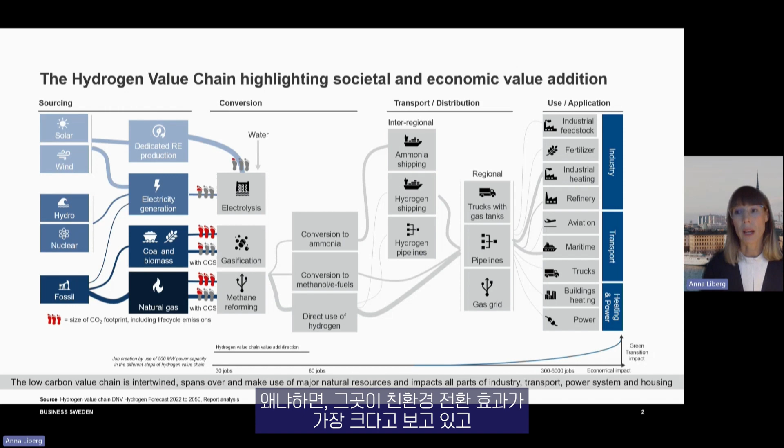And in the Nordics and Sweden, we would like to be part of all the steps, to also go all the way to what we call the top of the hydrogen value chain, which is to the right of the picture here, to also be part of the use and application side, because that is where we see that we have the maximum green transition effect, and where we also create the highest number of job opportunities, as well as export or import value. And we see a great potential with partnership with Korea and Korean companies to put both Sweden and Korea at top of the hydrogen value chain.

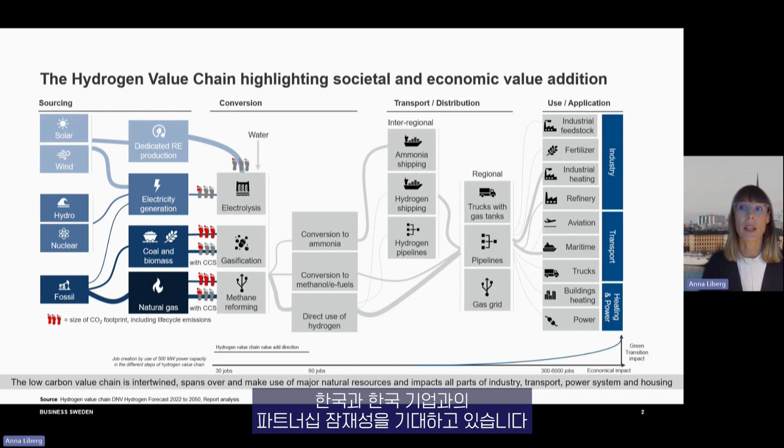I would just like to zoom out of Sweden and put Sweden into the context of the Nordics, our neighbors, because we share a few common important factors when it comes to hydrogen. We are a region that is fortunate to be very rich in producing electricity, and that is fossil-free, and to a very large part renewable electricity. An interesting data point is that Sweden is actually EU's largest net exporter of electricity, and that is fossil-free electricity.

We also have abundant amounts of fresh water and space. We have a very strong industrial heritage in all the different application areas where hydrogen is used. But I would especially like to highlight that we are all globally top ranked within innovation and sustainability rankings, which we believe is also crucial when it comes to pushing forward in development of application of hydrogen.

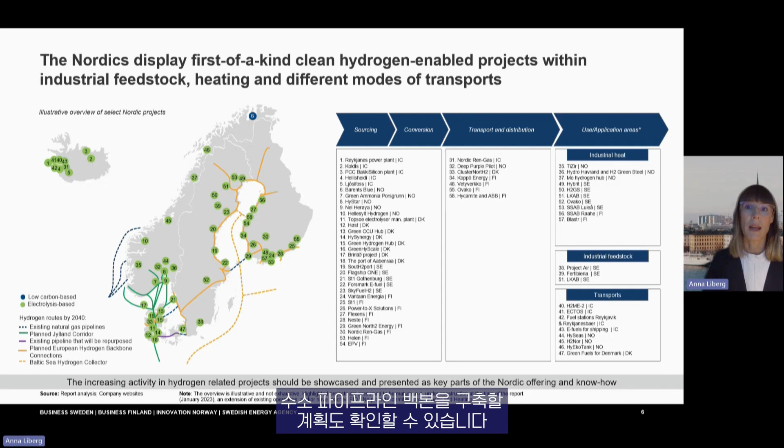And you also see that there is a plan to have a hydrogen pipeline backbone connecting us to central and continental EU.

Then looking out into global markets, besides our closest market, which is obviously the EU, it is obvious that Korea stands out as a very interesting partner, both from an export-import perspective as well as an investments perspective. That goes both for looking at hydrogen as such and derivatives of hydrogen, but also key enabling technology, as I have mentioned.

An area that I would highlight especially is the importance of creating a dedicated premium market for green products based on hydrogen. I think one key example is looking at what is now happening within steel, where we can see that it is possible to get a premium price for green steel of about 25%.

So even if the cost of green steel might be higher, you get an even higher sales premium price. Looking at the cost of steel going into the end product, such as a car or a windmill, it's a very small part of the total cost, but the end customer is ready to pay a premium. So this is a great example of how a premium market for green products can be created.

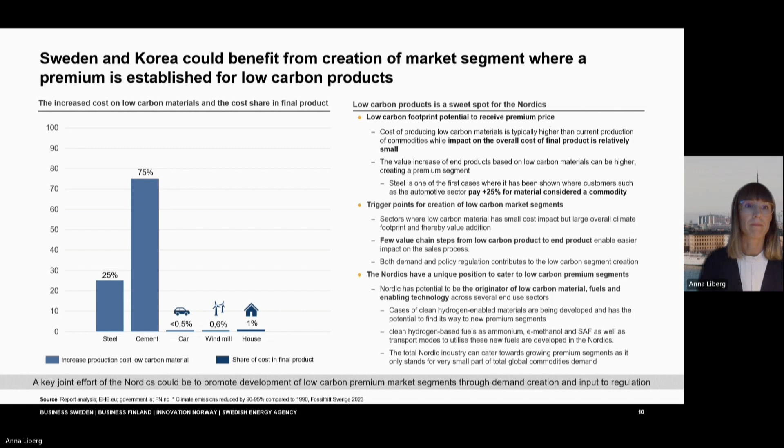We are leaders within sustainability and innovation. We have an ecosystem of actors within the industry and mobility which already are global brand names and are about to create first-in-the-world highlight and lighthouse projects. Besides hydrogen, we also have large access to biogenic carbon based on the large forest reserves in the Nordics.

Looking at hydrogen itself, we have in the Nordics an offer of both green hydrogen, but also blue hydrogen together with our neighbors in Norway. And of course, a key factor is that we have a large amount of fossil-free and green energy.

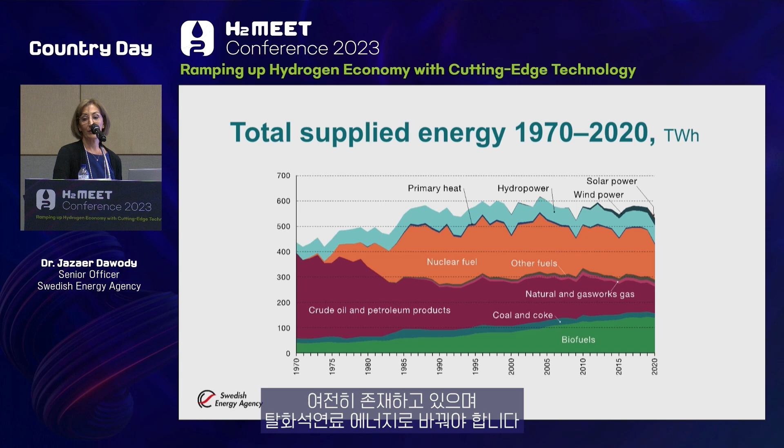It was mentioned earlier by Business Sweden that electricity in Sweden is clean, and it is indeed almost decarbonized. It's produced mainly from hydropower and nuclear power, but also wind energy, which has increased lately during the last 10 years. If we look at the graph there, you see it reached almost 17% of the total amount of energy for electricity production in 2020.

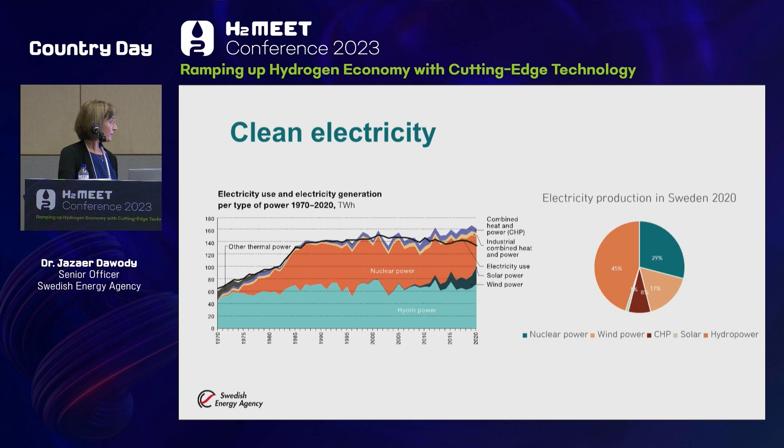So the electricity is clean, but also the heating sector is largely decarbonized, as you see. It's only 10% relying on fossil fuels here.

So what remains is to curb the emissions from the industry sector, but also the transport sector. In the transport sector, road transport is a major contributor to greenhouse gas emissions, while in the industry sector, we have the iron and steel industry emitting most of the greenhouse gas emissions, followed by minerals industries and the refineries. So fossil-free hydrogen is important for the decarbonization of the energy-intensive industries.

It's also very important to increase their competitiveness in the future global low-carbon economy. But hydrogen is also important for the decarbonization of the transport sector, mainly heavy-duty vehicles, long-haul transportation, including trucks, ships, and airplanes.

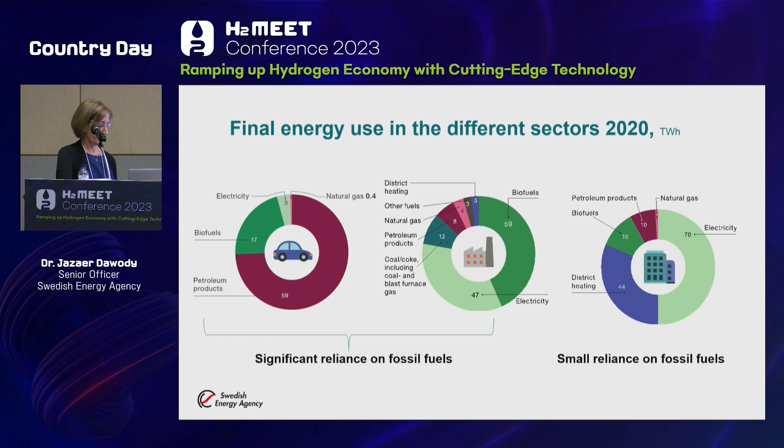Now I would like to spend a couple of minutes speaking about the national hydrogen strategy in Sweden. Back in 2021, the Swedish government commissioned the Swedish Energy Agency to propose a strategy for hydrogen, electrofuels, and ammonia, and the agency did, submitting the proposal by the end of 2021. But so far, we don't have the strategy adopted. However, the government assigned the Swedish Energy Agency and some other agencies to implement some measures which are very important for the development of hydrogen.

Anyhow, the strategy contains many important parts. One of them is the planning targets, which is to have at least 5 gigawatts of electricity capacity by 2030 and an additional 10 gigawatts by 2045. So in total, 15 gigawatts of electricity capacity to power the electrolyzers.

The strategy also highlights the targets for using hydrogen in Sweden, and the most important one is to reduce greenhouse gas emissions, but also to increase the competitiveness of Swedish companies, increase flexibility and security of supply, as well as export of fossil-free hydrogen products. The strategy also highlights the importance of hydrogen for different sectors, with the industry sector being the one most relying on the transition and using hydrogen—it's actually the industry sector driving the development, but hydrogen is also important for the power sector.

The strategy also highlighted core barriers and enabling measures to develop the hydrogen economy in Sweden. The barriers you see to the left - most important is the availability of fossil-free electricity. We do have fossil-free electricity, but it's not enough. We need to really enforce this capacity, almost double it, to meet the demand from the industries.

The other barriers are similar to other countries' barriers. It's anything from adapting the regulatory framework to having new policies to support hydrogen development, but also increasing acceptance in society, as well as increasing knowledge when we introduce a new energy carrier, and some more technical development and even more financial support.

So what you see to the right, the cube, shows 4 areas to support the development of hydrogen in Sweden. These are financial incentives, but also adapting the regulatory framework, collaboration to develop the value chain, as well as...

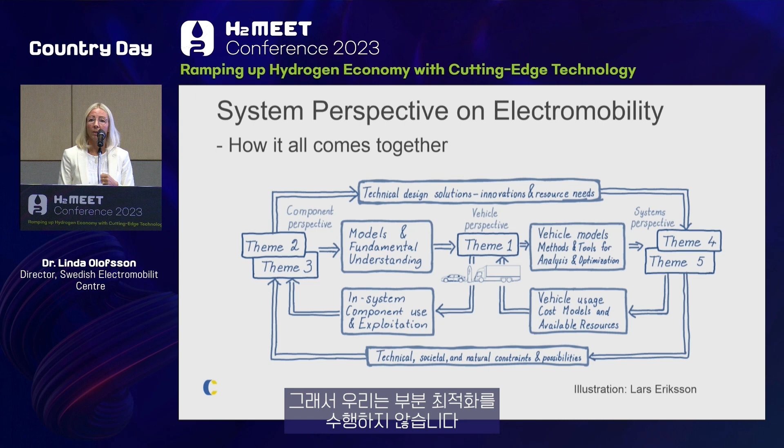So just to briefly repeat what Jazaer said about hydrogen in Sweden. There are high ambitions for hydrogen in Sweden when it comes to the industrial transformation with green steel, fossil-free steel I should say, because we do have nuclear power.

And then we think that there might be excess production of hydrogen at these local places with industry, and that might actually benefit the transport sector.

However, there is a lack of infrastructure in Sweden. We are not a gas country, so we need to work on pipelines and also fueling stations, but I guess that's something we have in common with many. We need to work on the standards for that, etc.

And for transport, hydrogen was considered both for the combustion engine and for fuel cells. Within the center, we are working with fuel cells.

So if you look into fuel cells in electromobility, I would say in Sweden, and maybe in many places around the world, we have this battle of systems for heavy duty, long-haul transport, where we need to solve issues because batteries will be too heavy and charging time too long. We have three different solutions that we are actually demonstrating in Sweden, all of them, and we have projects within the center.

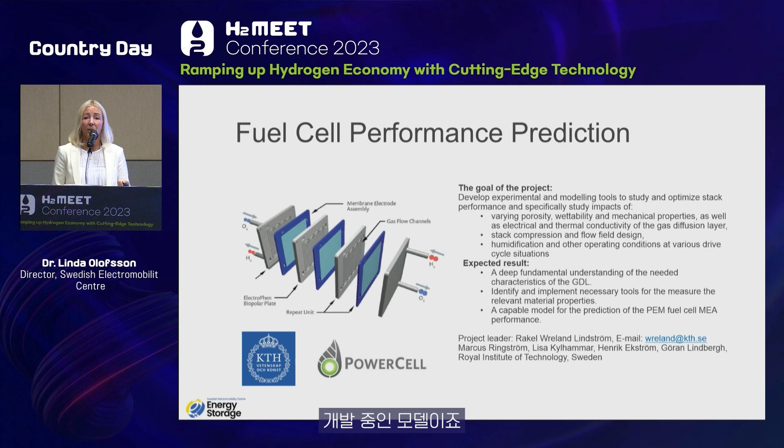It's a model that we are developing with both theory and experimental measurements to understand the fuel cell. So far we have developed a multiphysics model that performs quite well at low and intermediate current densities, as you can see here. It involves measurements of mass transport, electrical properties, mechanical structures, and thermal properties, and then is also complemented by theory.

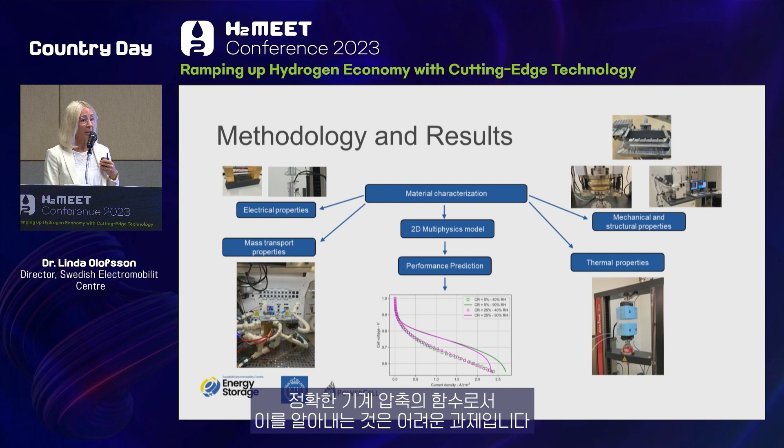So what I should say is that it seems to agree reasonably well with the experimental data. However, one must know the transport properties as an exact function of mechanical compression, which is challenging. It also seems highly sensitive to electrical contact resistance, but I think that's something we are aware of.

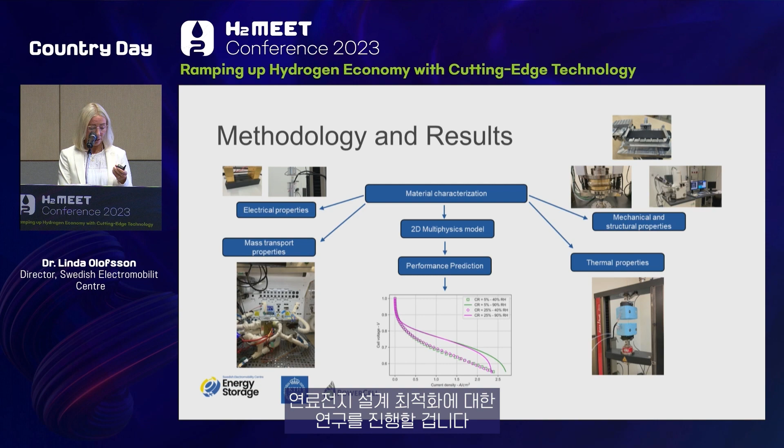Future work will try to link the microscopic properties to the pore scale properties of the cell, and also try to understand more about wet and dry diffusivity as a function of compression and performance at higher densities, and optimization of the flow field design for performance improvement.

We are also looking into how we can make the PEM fuel cell perform at higher temperatures, which is something we would like because we would like to use less energy for cooling the fuel cell. There might also be challenging applications, for example going uphill, where we want to use the battery electricity for other things than cooling.

So here we are trying to understand what's going on when we raise the temperature of the fuel cell, and what's going on with the oxygen pressure and the relative humidity, and how that affects the performance of the fuel cell. We see that we can actually optimize the parameters to make it perform well even at higher temperatures.

However, when we force it to age, we can see that it's aging, but it's not as simple as being dependent on temperature alone, it actually breaks at a higher temperature after a few cycles.

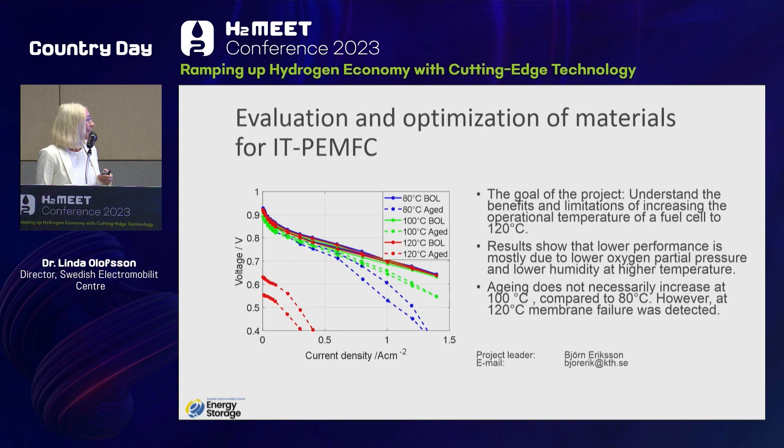I only have a few minutes left, so I will try to go through the system projects that we run. What I can say is that we are really strong in Sweden at the fundamental level, material characterization, etc. The projects that I told you before are areas that we are really strong in.

But when it comes to the system and how to integrate it in the vehicle, we learned through workshops that this is something we need to improve in Sweden. So we have started a number of projects together with the industry, and also realized we need a digital understanding of what's going on, and a test lab to test it. So the infrastructure, both digital and physical, is important for the research in this area.

We started by developing a digital twin - a model and simulation platform for electrical vehicles, where we included also the fuel cell. Here you can optimize a number of parameters, and actually simulate the whole vehicle, what's going on, by changing, for example, characteristics of the fuel cell. It's quite advanced, and we keep developing it.

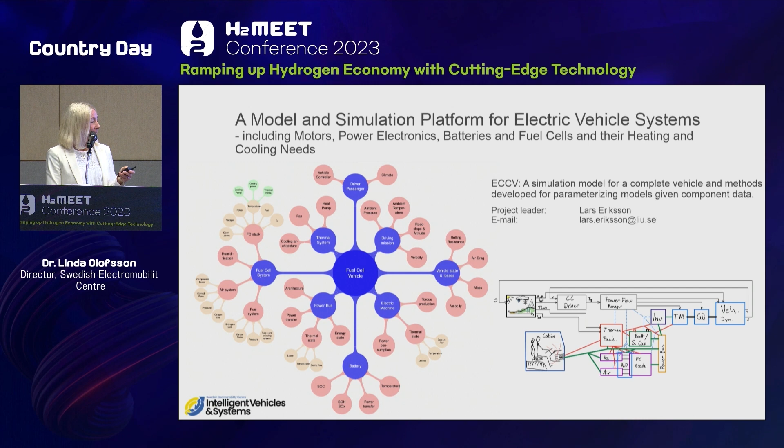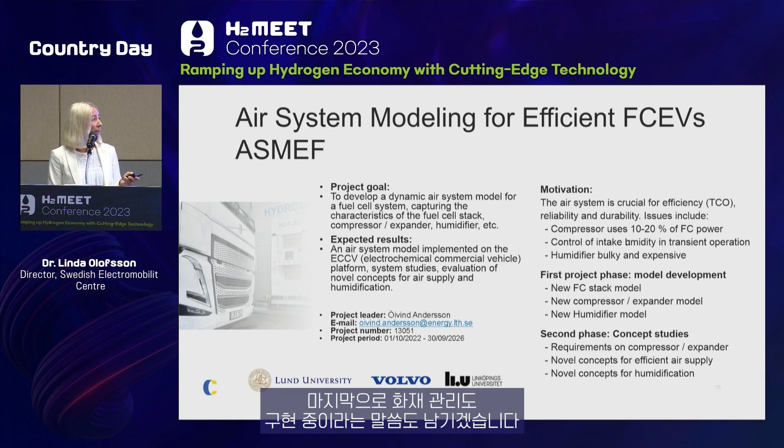We actually have two PhD projects where we are working on making this model even better. One project aims at implementing functions concerning air handling in this digital twin. And because my time is running up, I'll also say we're implementing thermal management in the twin as well.

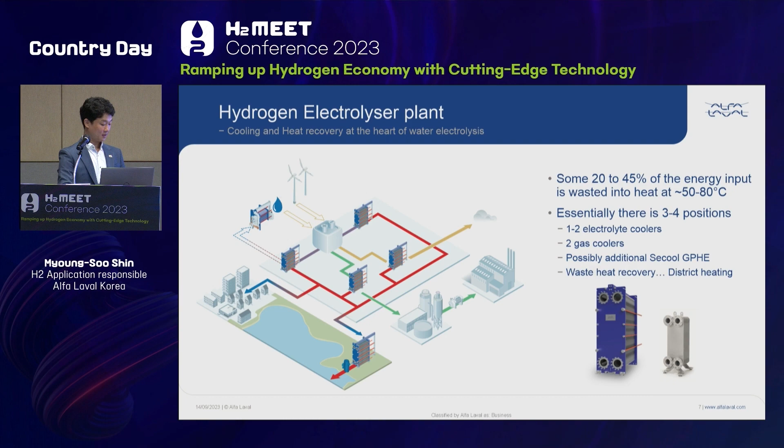그린 수소를 생산하는 데 있어 핵심 요소 중 하나는 깨끗한 물의 공급입니다. 대부분의 사람들이 물에 대해서는 간단히 얻을 수 있는 자원이라고 생각하실 텐데, 전기 전해에 적합한 물을 대용량으로 얻는 것은 생각보다 까다로운 일이 될 수 있습니다. 일반적으로 10메가와트 정도의 전기 전해조에서는 매일 60세제곱미터의 물이 사용된다고 합니다.

유럽에서는 2030년까지 약 80기가와트의 전기 전해조 설치를 계획 중에 있는데요. 이때 필요한 물의 양을 계산한다면 매일 약 48만 세제곱미터의 깨끗한 물이 요구된다고 계산해 볼 수 있습니다. 이 48만 세제곱미터의 물은 300만 명이 거주하는 LA에서 하루에 소비되는 물과 같은 엄청난 양입니다.

그리고 또 앞서 전기 전해 이후 20에서 40%의 에너지가 폐열의 형태로 방출된다고 했는데요. 80기가와트의 전기 분해조에서 방출되는 폐열을 거칠게 계산해 봐도 16에서 32기가와트의 거대한 에너지가 활용되지 못하고 버려질 위기에 있는 것입니다. 알파라발은 이 두 가지 사실에 연계해서 해수 담수화라는 아이디어를 제안드립니다.

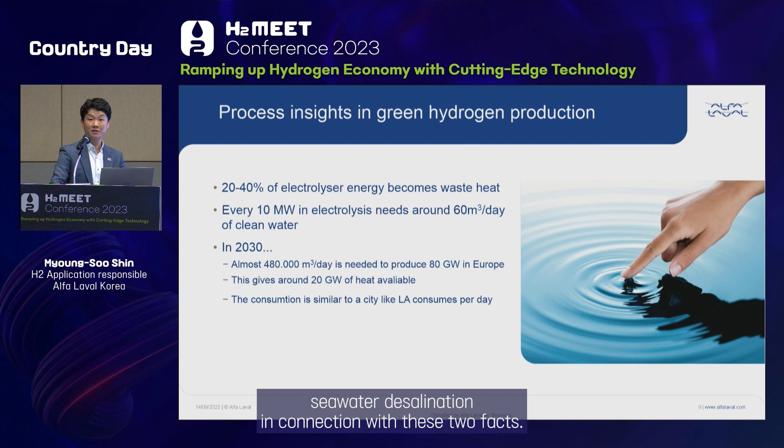가장 널리 사용되는 PEM 방식의 전해조에서 생성되는 폐열은 약 50도 정도의 온도를 갖고 있는데요. 이 낮은 등급의 폐열은 다른 용도로 사용되기가 쉽지 않습니다. 하지만 놀랍게도 이 저준위 열원은 알파라발에서 공급하는 해수 담수화 장비를 운전하는 데 충분한 열원이 됩니다.

담수화 시스템과 전기 분해 시스템을 함께 운영할 경우 약 27% 정도의 에너지 효율 증가를 기대할 수 있고, 담수 생산과 전기 분해라는 순환 사이클 또한 만들어낼 수 있을 것입니다.

그리고 또 하나, 담수화 장비를 선택하는 데 있어 친환경 인증 여부도 고려해야 되겠는데요. 알파라발에서 공급하는 담수화 장비는 증발 방식이기 때문에 멤브레인 방식의 담수화 장비보다 화학물질의 사용이 매우 적고, 이는 오펙스 측면뿐만 아니라 친환경적인 의미를 갖는다고도 설명드릴 수 있습니다.

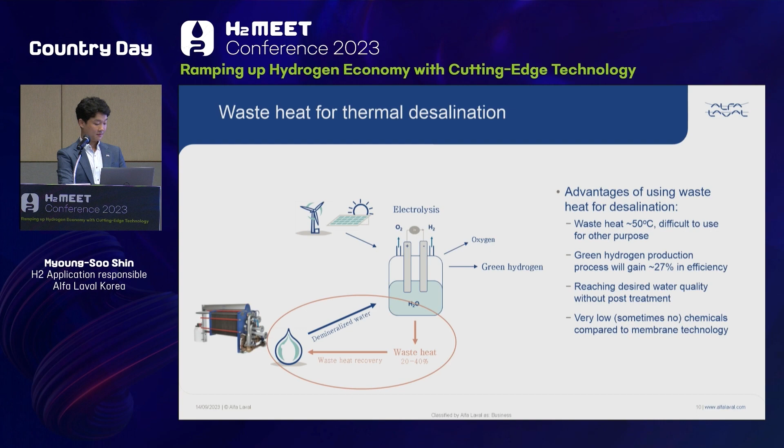또 하나 흥미로운 이야기를 드릴 텐데요. 전기 분해조 그리고 담수화 장비의 폐열 활용 사이클은 청수 공급에 한계가 있는 해상 풍력 발전에 주요하게 적용하면 좋겠습니다. 해상 풍력 발전 플랫폼에 담수화 장비와 전기 분해조를 함께 설치한다면 청수 공급에 대한 인프라 구성 없이 그린 수소를 보다 손쉽고 효율적으로 생산해 나갈 수 있을 것입니다.

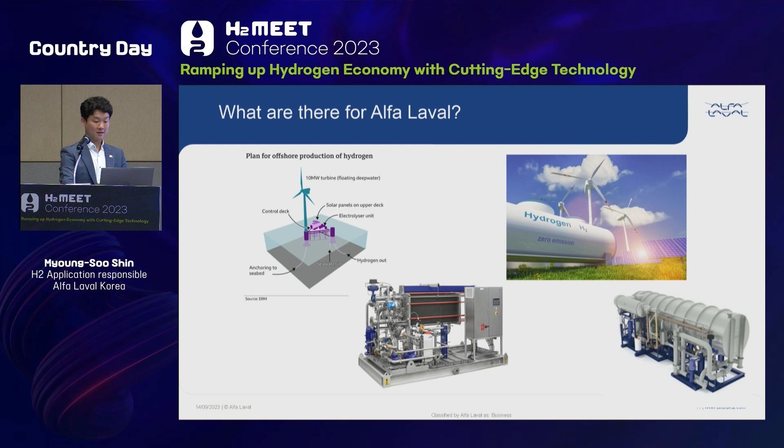다음으로는 수소 충전소, 하이드로젠 리퓨얼링 스테이션에 적용된 판형 열교환기를 소개해 드리도록 하겠습니다.

우리는 물류 부분에서 화석 연료에서 청정 에너지로의 전환을 목격하고 있는데요. 대형 또는 장거리 운송 수단에서 주요하게 사용될 수소 자동차 분야에서도 판형 열교환기는 중요한 역할을 하고 있습니다.

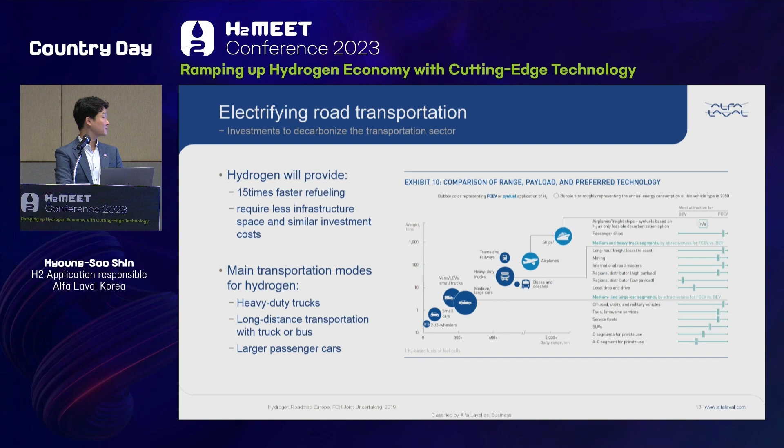우리가 HRS라고 부르는 수소 충전기 디스펜서는 수소가스를 고압 350바에서 700바까지 압축해서 수소 자동차에 공급하게 되는데요. 수소 압축 과정에서는 많은 열이 발생하게 되는데, 충전 속도를 높이기 위해서는 고온의 수소는 반드시 냉각 후 수소 자동차에 주입돼야 합니다. 이 냉각 과정에서 알파라발의 특수 열교환기가 효율적인 냉각에 도움을 줄 수 있습니다.

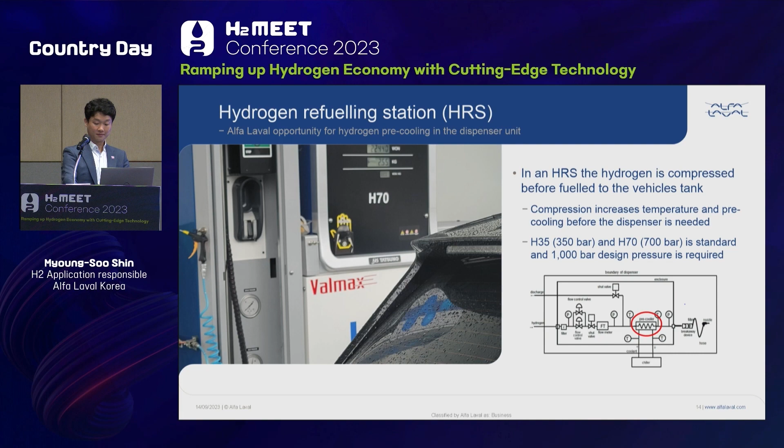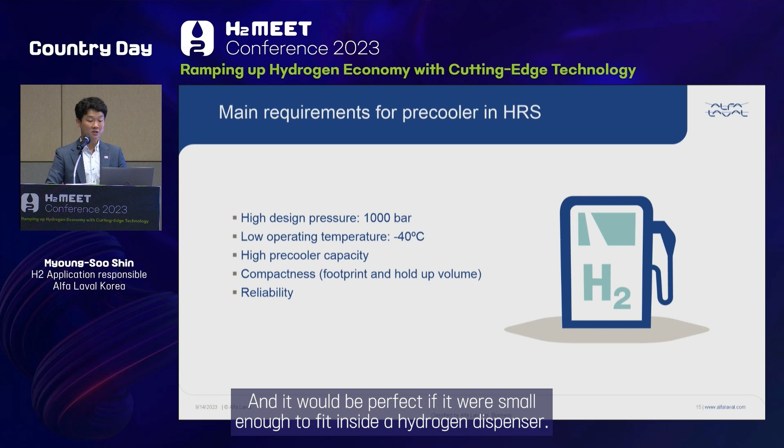현재 시장에서 소개되고 있는 솔루션은 크게 두 가지입니다. 쉘앤코일 타입과 PCHE 타입인데요. 쉘앤코일은 범용적인 솔루션이지만 열교환 효율이 낮다는 한계를 가지고 있고요. 이 낮은 열교환 효율로 인해서 열교환기가 비대해지고 디스펜서 역시 비대해지는 악순환이 발생합니다. 더불어 원재료가 많이 투입되기에 상대적으로 고가라는 단점이 있습니다.

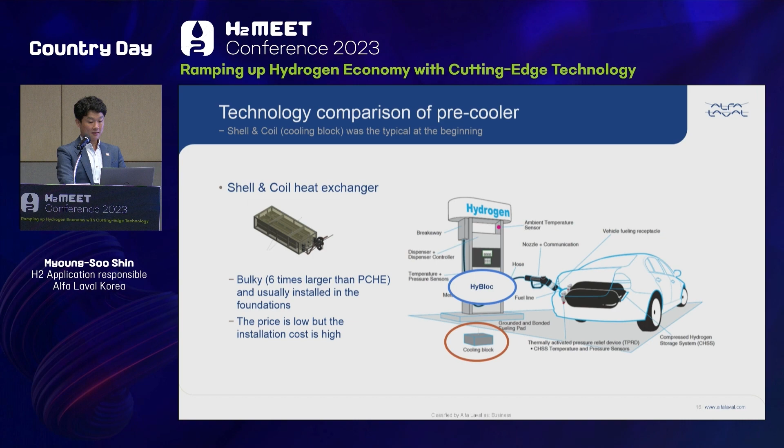알파라발에서 공급하는 하이블럭은 수소 디스펜서 전용 제품으로, 판형 열교환기 기술을 이용하기 때문에 열교환 효율이 매우 높아 컴팩트하게 제작이 가능합니다. 하이블럭은 디스펜서 소형화에 아주 적합한 솔루션이라는 말씀을 드릴 수 있을 것 같습니다.

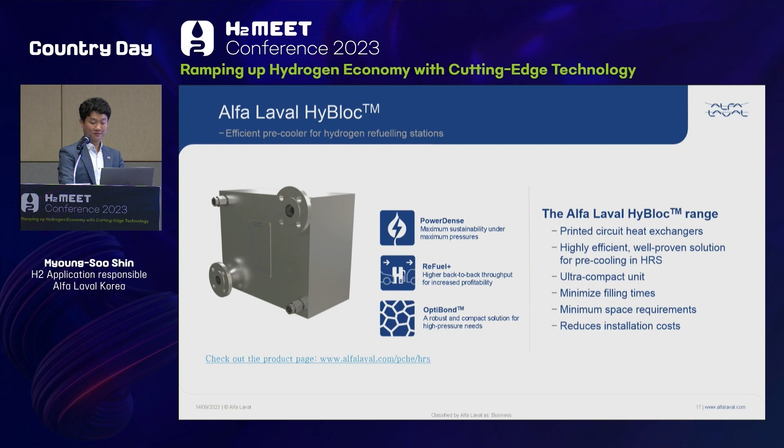잠시 하이블럭, 이 PCHE 타입 열교환기의 제조 방식을 잠시 소개해드리고자 합니다. PCHE는 Printed Circuit Heat Exchanger의 약자로, 전열판을 케미컬 에칭 방식으로 유로를 생성한 다음에 여러 장을 적재하고 그것을 디퓨전 본딩을 통해 제품을 생산하게 됩니다. 이를 통해서 최대 1000바, 그리고 마이너스 196도까지 운영 가능한 열교환기가 제조될 수 있는 것입니다.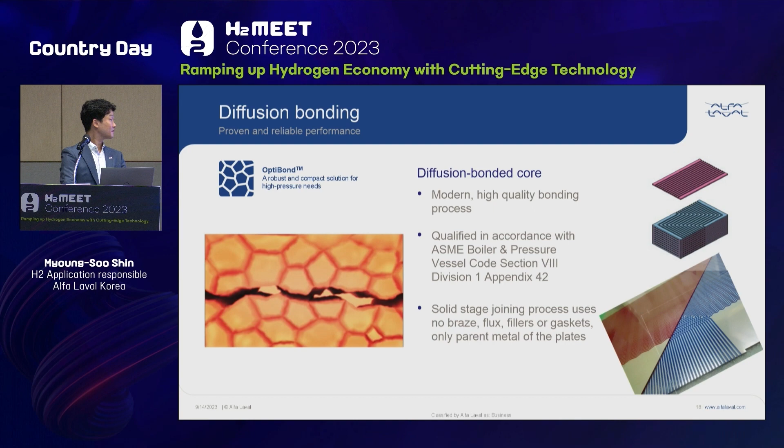알파라발의 하이블럭은 이미 전 세계 수출 시장에 많이 공급이 돼서 그 효용성을 인증받고 있습니다.

여기 마지막 장이 주제가 될 것 같은데요. 수소 연료 전지의 효율성 증대에 대해서도 소개해 보도록 하겠습니다.

모두가 알고 계시듯이 지금까지 우리가 주요하게 사용하고 있는 전기 생산 시스템은 화석 연료를 기반으로 했고 많은 탄소를 배출했습니다. 미래에는 수소 연료 전지를 통해 탄소 배출 없는 청정한 전기를 사용하게 될 것입니다.

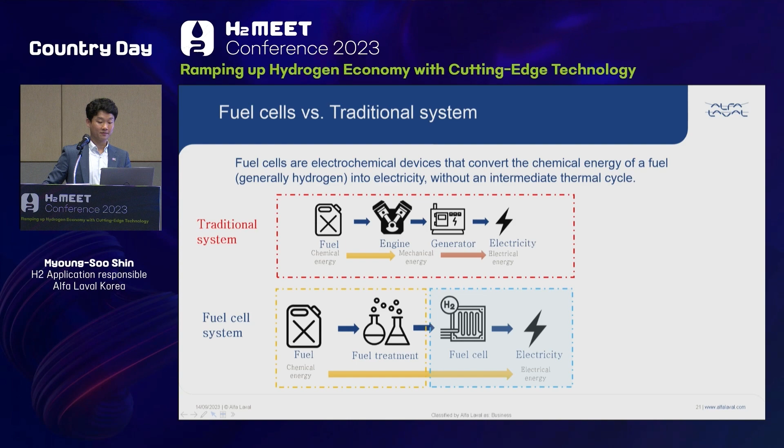수소 연료 전지에서의 효율성 증가는 앞서 전기 분해에서의 아이디어와 매우 동일합니다. 수소 연료 전지 자체의 에너지 효율은 약 40에서 60% 정도밖에 되지 않는데요. 폐열 회수를 했을 때 비로소 에너지 효율을 약 80%까지 끌어올리는 것이 가능해집니다.

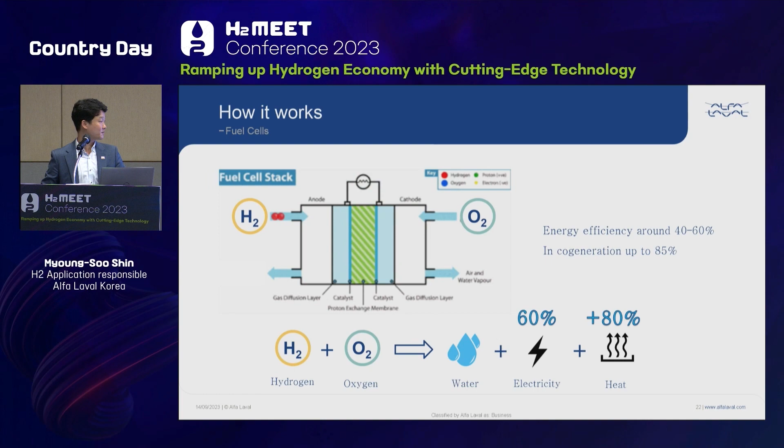그리고 또 하나 덧붙이면, 현재 시점에서 수소의 생산 단가는 전통적인 기술보다 매우 높다고 볼 수 있습니다. 높은 단가로 생산된 소중한 수소가 손실 없이 온전히 에너지로 전환돼야만 시장의 경제적 신뢰성을 높일 수 있겠습니다. 이런 요구 때문이라도 폐열 회수는 반드시 필요하다고 다시 한번 강조드리고 싶습니다.

마지막으로 알파라발에서 2030년을 목표로 추진하고 있는 컨셉 제로를 소개해드리면서 제 발표를 마치고자 합니다. 컨셉 제로는 제철 산업에서 화석 연료를 사용하지 않고 수소 환원 제철로 생산된 열교환기를 공급하는 프로젝트입니다. 알파라발이 수소 경제 선순환을 만들어가는 선구자적 역할을 하고 있음을 보여드리면서 제 발표를 마치도록 하겠습니다. 긴 시간 들어주셔서 감사드립니다.

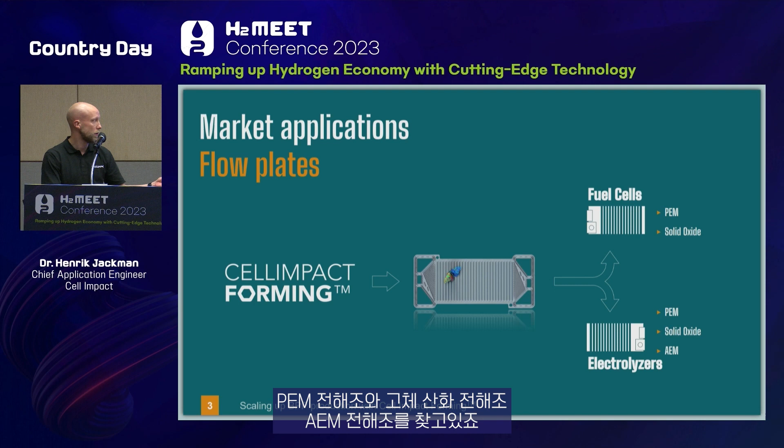The markets that we deliver our plates to are fuel cells and electrolyzers, and the technologies we are looking at are PEM, which is low temperature, and also solid oxide fuel cells. We are also looking at electrolysis, where we look at PEM electrolysis, solid oxide electrolysis, and AEM electrolysis. We think our technology is well suited and will have very good quality to produce plates for these technologies.

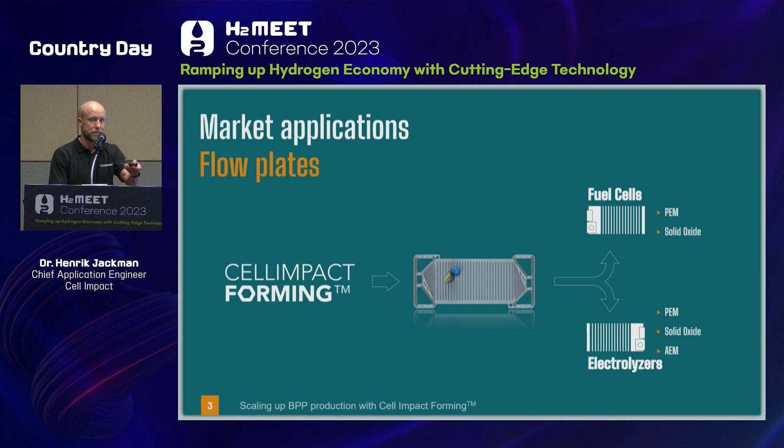What I'm here to talk about is the scalability and how we can scale up the manufacturing of these plates. The problem to be solved is the scaling up.

What is evident here at H2Meet is that the generation and usage of hydrogen needs to be scaled up to manage the green transition. For this to be possible, a lot of flow plates for electrolysis and fuel cells will be needed in the near future. Soon, billions of bipolar plates will be needed for electrolyzers and fuel cells, and it's very difficult and expensive to scale up these technologies with existing technologies we have today.

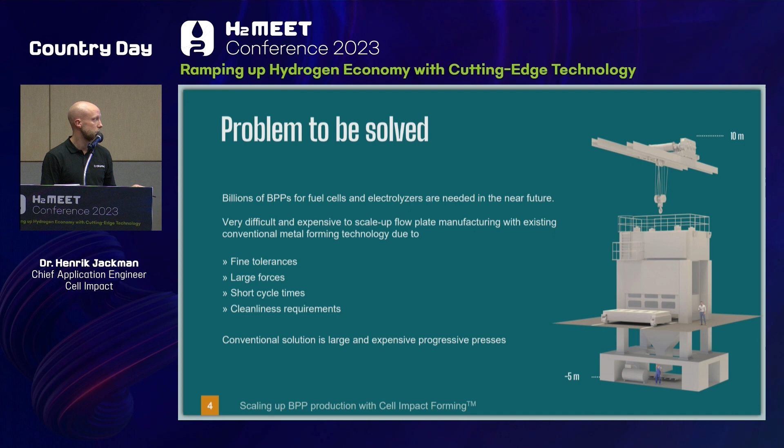As you can see, they are quite large. They also require a big foundation below floor level that needs to be accommodated in your factory. So in order to have these in your factory, you basically need to build a completely new factory to accommodate for these presses. The forming is made with lubrication, which then needs to be cleaned after you have formed the plate, and this is an extensive and energy-intensive process.

The solution that we have to this, we call Cell Impact Forming. This forming technology, coupled with the downstream process we have, is scalable since it's cost efficient. We are able to have a short cycle time at around 1 second for this small forming unit. We also form without lubrication, so we don't need to remove lubrication with an extensive cleaning process, and this gives us low water and energy consumption in the manufacturing process.

One important aspect is that you can put this small piece of equipment on a standard industrial floor, as it stands on dampers, so we don't need the large foundation required for the large progressive presses. Our philosophy at Cell Impact is that each production process should be tailored to ensure high quality and lifetime, which is why we split up the forming of the plates and the cutting of the plates, to really increase the quality and lifetime of the tools and the plates we deliver.

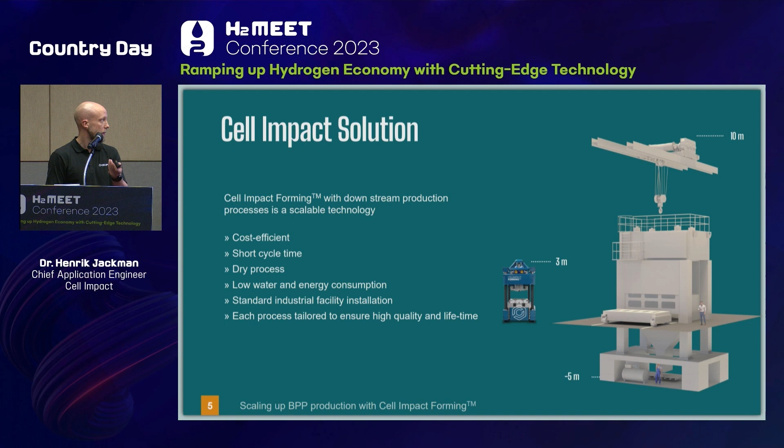Here are some more facts about Cell Impact Forming. It's a high velocity forming technology. We say it's 1,000 times faster than competing technologies, and by that we mean the speed of the tool. The speed of the tool when it comes down is around 5 to 10 meters per second, whereas conventional technology forms at millimeters per second. This is why we say we are 1,000 times faster.

We're not using any lubrication, as I mentioned, and the technology is unique, so we say it's low in complexity. The low complexity comes from having very few moving parts when we do the forming—basically just a tool that is moving. This reduces the amount of maintenance needed for the forming, and this lowers the life cycle cost of our complete manufacturing of the plates.

We're also able to distribute the energy very evenly on what we are forming, which is important. And this gives us a long tool life compared to competing technologies.

Another important aspect, since you need billions of these plates in the near future, is that the technology is scalable. It comes with low capital investment, so low capex, and also low operational cost, since the technique is quite simple. I've already mentioned that it's low on water and power consumption because we don't need to clean away the lubrication.

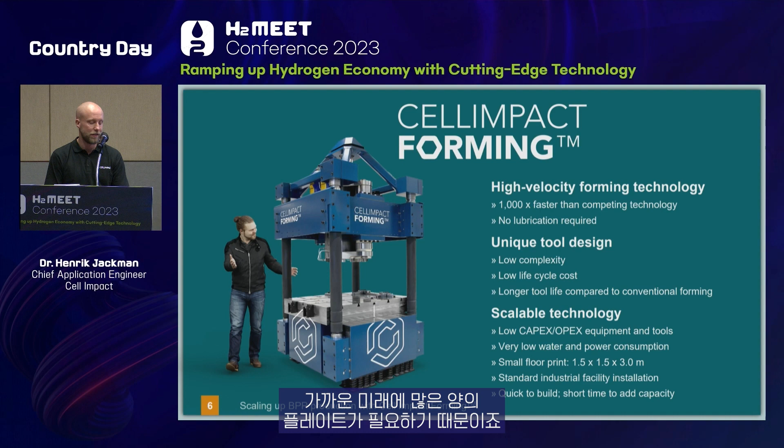Some important aspect is that we form at high velocities, and this gives us an advantage, since when we form at high velocities we get increased formability. This increase in formability comes from a phenomenon called strain rate hardening, which locally stiffens the material in high strain rate regions, reducing the thinning in these regions. This is a critical parameter for the flow field cross-section, so it reduces the thinning, which then increases the formability.

Another important aspect is that we're able to distribute the forming energy very evenly across the whole flow field that you see here. You want to have as uniform a depth as possible in this region, and we're able to distribute this very evenly. When we measure our plates, we have a maximum minus minimum depth in this region that is less than one hundredth of a millimeter. So these are the tight tolerances I'm talking about when I say that flow plates for fuel cells and electrolyzers require really fine tolerances.

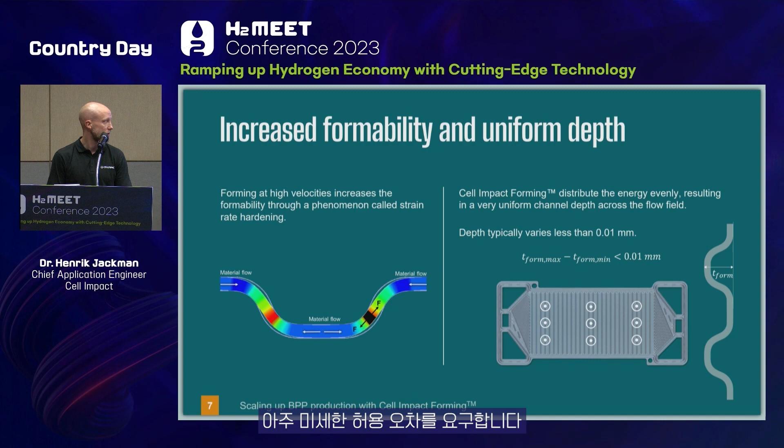Another advantage of our technology is the tool lifetime. To prove this, we did a test together with the customer where we formed 2 million plates with a smaller test tool. We ran a tool for 2 million plates, consuming more than 150 kilometers of sheet metal for this test. After the test, we evaluated the tools, and they didn't show any signs of fatigue, no adhesive wear, no plastic deformation, and the tool was still within tolerances after the test was done.

The tool we have in production today that has formed the most plates is 1 million, and it shows the same characteristics as the test tools. We believe our lifetime is at least 2 million plates, and we attribute this to the fact that we can distribute energy very evenly on what we are forming, which gives us this long tool life.

The materials used in PEM fuel cells today are stainless steel, specifically austenitic stainless steel with grades 304 and 316. We also have experience and production with titanium, commercially pure titanium grade 1 and grade 2. The thicknesses we use are 100 microns, or 0.10 millimeters, but we've also tried for small test tools thicknesses down to 50 microns and up to 300 microns, which can be used for electrolysis applications, while smaller thicknesses can be used for more lightweight applications.

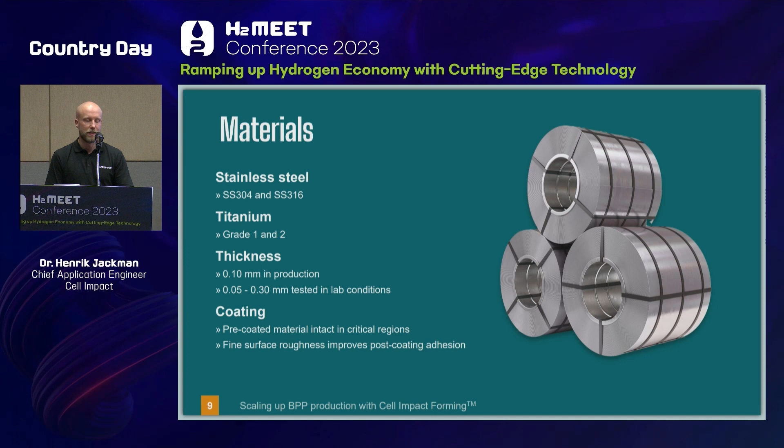The plates need to be coated when they go into a fuel cell or electrolyzer, and we have good experience with both pre-coated and post-coated material. For pre-coated material, customer feedback shows the pre-coating stays more intact in the critical regions needed for fuel cells compared to competing technologies. For post-coating, we see that the uncoated material we form has a more uniform surface structure after forming, which is an advantage for post-coating because you can optimize the post-coating process more narrowly to get better adhesion. So this is also an advantage of our forming technology.

There are more processes needed than only forming to develop or manufacture bipolar plates. So in order to do this, we have innovated some industry-first downstream processes that we call high-precision punching, high-speed laser welding, automated leak testing, and sampled measurements. We have developed these to ensure high quality, long lifetime, and short cycle time for all these processes.

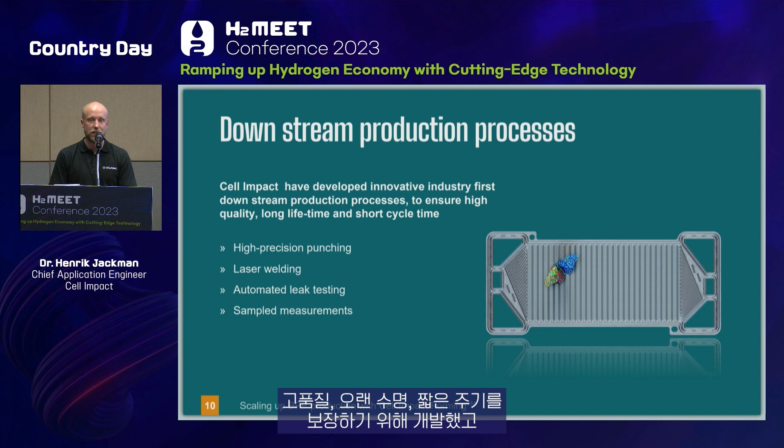High-precision punching, we have developed this for large volume plate production, and we try to have the same philosophy as with the forming unit that I showed earlier. We have made this press compact and with high precision, so that we can have high quality, but also a compact unit that can stand close to our forming unit.

This doesn't require high force, since we're only cutting very thin material. It only requires a couple of tons, so it can be a press with quite low force. We do this also without lubrication, so it's a dry process, so we don't need to clean. The cycle time today is below 2 seconds, but we strive to have it down to 1 second when we develop it a bit more.

The burr size, which is the quality of the cut, is less than 10 microns, and we have kept this for more than 200,000 punches with this tool. We can resharpen these tools more than 10 times, so this would give us a lifetime of at least 2 million, which is an important factor for our customers, because it's part of the cost.

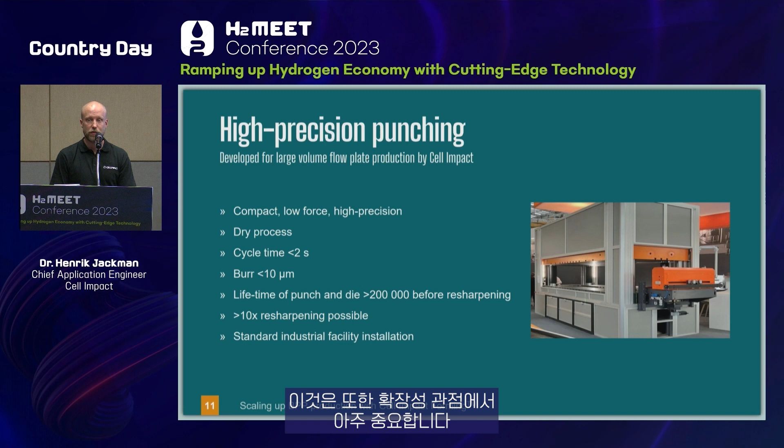And just as with the Cell Impact forming unit, you can put it on the standard industrial floor, as it has very, very low forces. So this is also an important aspect from the scalability point of view.

We also have laser welding, where we have developed a fully automated system for laser welding, where we fully seal the hydrogen, air, and coolant circuits. With the current design, the weld requires two welding steps, which is why you see two laser welders here. In both of these steps, you have multiple galvo scanners, which is a mirror that deflects the laser beam, and this is to decrease the cycle time.

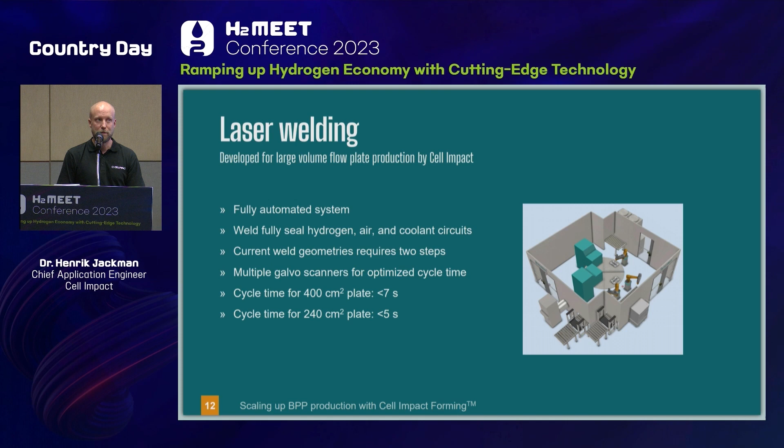The cycle time for the plates also depends on the size of the plate. For a plate with 400 square centimeters in active area, we have a cycle time of less than 7 seconds. For a plate of 240 square centimeters, we have a cycle time of less than 5 seconds. Of course, we can tailor the process. If laser welding is not needed, then we can remove this process if only monopolar plates are needed.

We have also developed an automated leak testing equipment, which is fully automated and uses helium to detect very tiny leaks. Since we are welding the plates, we need to check that the welds are leak tight. This is a requirement from our customers, so we leak test 100% of the plates we manufacture today. Helium is used both to detect small leaks and to speed up the leak testing process.

Since we weld the hydrogen, air, and coolant circuits, we need to test all these circuits to make sure they are leak tight. The leak test has the capability to test leaks down to 4.8 times 10 to the power of -5 millibar liters per second. This probably doesn't tell you that much, but it's a very tiny leak that this can detect, and our customer requirements are much larger leak rates than this. The cycle time for doing this test is between 6 to 12 seconds, depending on how many plates we test at one time.

It's also important that we know what we are producing, so we have invested quite a lot in measurement technology. We have this machine that is able to measure with digital optics, chromatic white light sensors, and laser scanners. With the digital optics, you can look at how the cut holes relate to the formed features, so we can see that the cut holes and formed features are within tolerance.

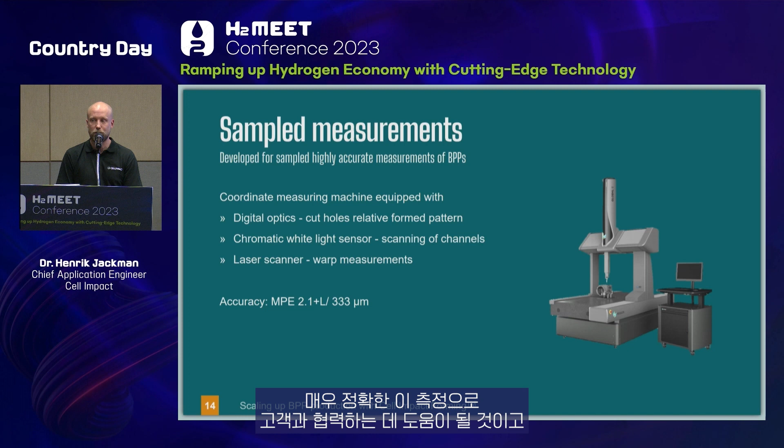Also important, when we do projects together with a customer, we want to have a design for manufacturing phase. So we want to... oh, wrong button. Let's see, go back.

Here's the laser pointer. So we want to have a design for manufacturing phase at the start of every project. This starts with the customer sending their design to us. We review the design in terms of manufacturability for all the processes that the plate goes through. We look at the forming—can all the features in the plate be formed? We look at the cutting—is it possible to cut it with good quality, or do we need to make some small tweaks? And also welding and leak testing. It's important to have this process because most of our customers don't really know what kind of geometries they are able to manufacture. So it's important to keep in mind that the geometry you design must be manufacturable to ensure the best quality and the lowest cost.

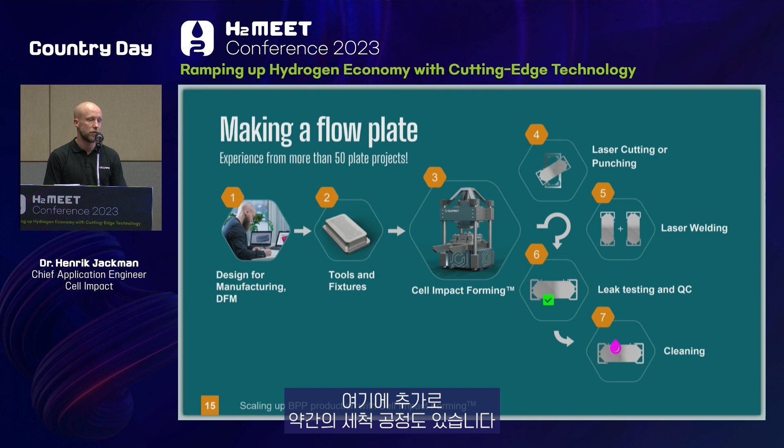When we are finished with this process, we go on and design the tools in-house at Cell Impact, and then we send them out for manufacturing across Europe, where we have selected tool makers because the tools need really fine tolerances to be able to form these tight tolerances. The tools need to be very fine. Then we go on to Cell Impact forming, cutting holes in the plates, laser welding, leak testing, and other quality control. We also have cleaning processes we can do on the plates if needed, to remove particles that have ended up on the plate.

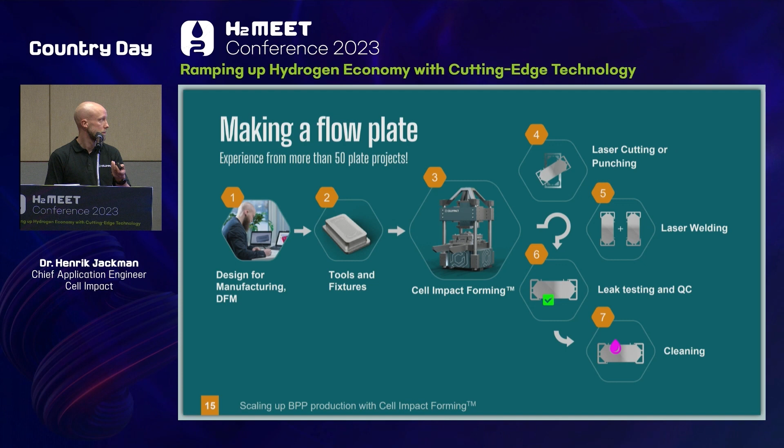In summary, Cell Impact forming and our other technologies are scalable, and we try to make them compact, low in complexity, and cost efficient. We are an innovative company where we have come up with very innovative industry-first downstream process manufacturing technologies. We are up and running now. We are one of Europe's biggest manufacturers of bipolar plates, and deliver plates to Europe, China, Japan, and North America. We have experience from more than 50 bipolar plate projects, so we have a lot of experience to suggest to our customers that can really help them going forward. We know what geometries can be manufactured. So I think that was everything from me. Thanks everyone for listening.

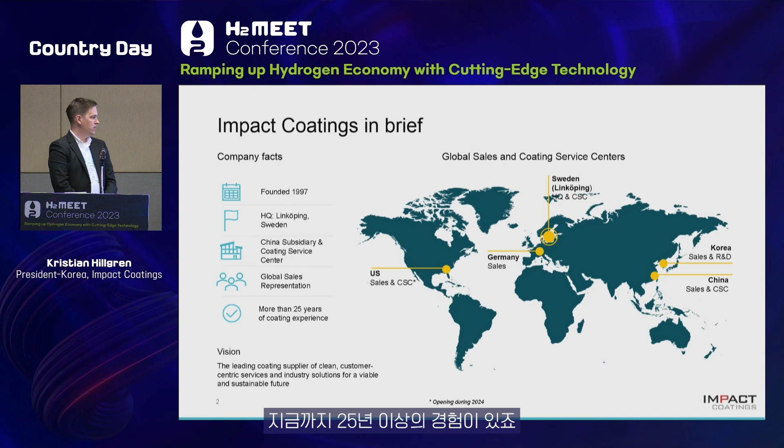First, just Impact Coatings in brief. We are a Swedish company. We were founded in 1997 as a spin-off from Linköping University. We're still headquartered in Linköping, but lately we have been expanding globally, and now we have offices in the US, in Europe, in China, and in Korea. In China, we have recently also opened a coating service center, so we have operations there, and we're planning to expand and do this in the US as well next year. We were listed on the Nasdaq Stock Exchange in 2004, so we have been around for quite some time now, with more than 25 years of experience.

We are also growing in our hometown—we are building a new headquarters, more than twice the floor space for offices and production facilities, to meet the growing demands from the market. This will be ready in about a year, sometime September 2024, when we hope to move in. We have been seeing growing demand in North America from the hydrogen industry, especially green hydrogen production, so that's why we are investing in the US. We're also investing in Sweden, expanding our coating service center there, moving to multi-shift production, and hiring people. So this is all really going well for us right now.

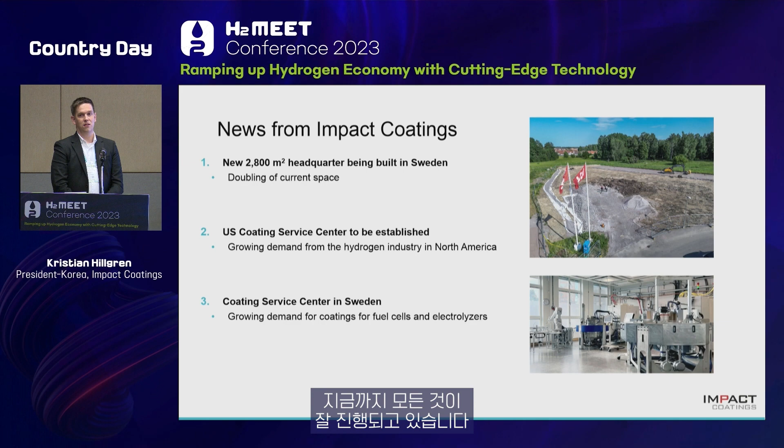Our new facility in China, in Shanghai—the formal inauguration is in about 2 weeks. It's already operational, however, and there we have the capacity to provide coated fuel cell plates, about 1 million plates a year as the initial capacity. So there is a growing increase in China for sure.

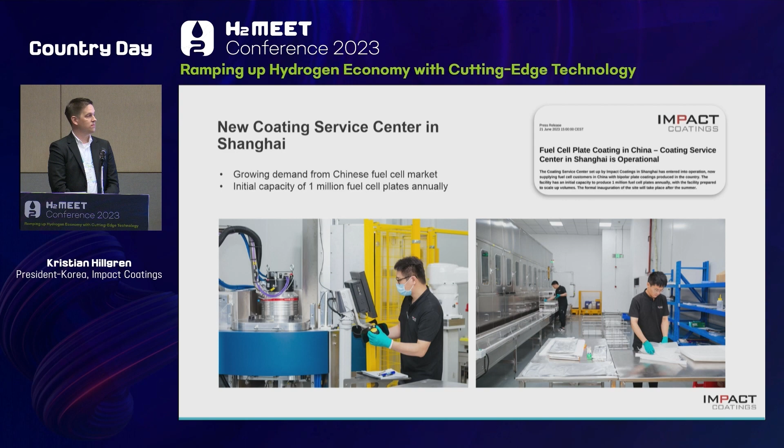Impact Coatings is a full-service supplier of PVD coating solutions. We're not just an equipment provider, we're not just a technology provider, we don't just provide coating service, we actually provide all of it. And this is really to be a customer-centric company to support faster innovation and scalability, which really helps the industry grow.

Because every hydrogen company has their own unique challenges. Some are asking for very specific technologies, some are having scale-up issues, others are asking for mass manufacturing. So we have seen that we need to be very agile to be able to support the industry in the most flexible way possible.

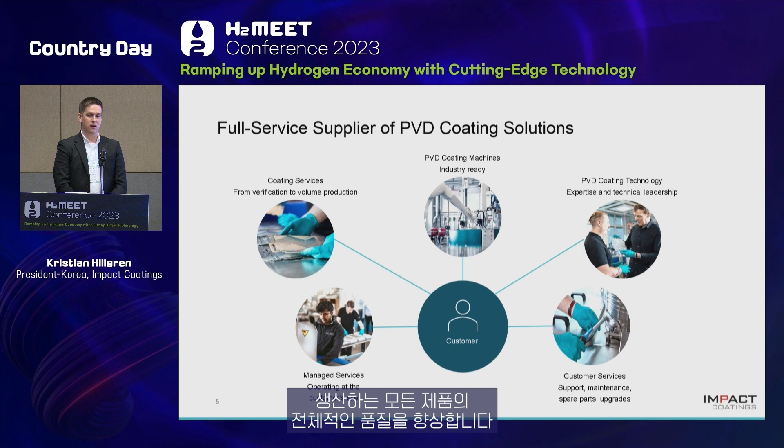We also have an interesting concept called managed services, which we think is unique. That is essentially where the customer would buy our equipment, but we would send in our team and operate the machine for a couple of months to help the customers learn the complicated technology. This will reduce the risk of error and mistakes, and increase overall quality of everything that is produced.

Another interesting thing with coating services, since we both sell equipment and coating service, it means we can be a second source. So should a customer buy equipment and have some dynamic request, a change in how much they need to produce, we can help them supply from our coating service center. This is also something we think is truly unique.

Our coating service also helps with prototyping, pre-series and ramp-up as needed. And now we can do this in Sweden, we can do it in China, we will be able to do it in the US, and after that, well, we will see where the next investment will be made.

Lately, we have also been having new business success in the electrolyzer market, which is very interesting.

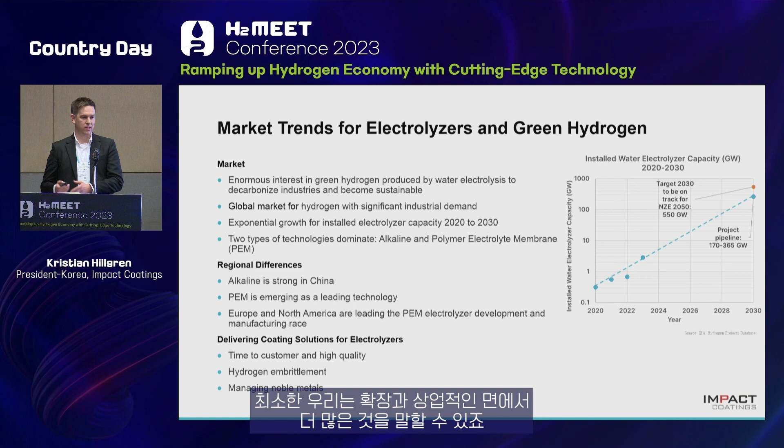And we also have to deal with some noble metals, which I will also talk a bit about. So I will present 3 products now and give some highlights. A next generation premium fuel cell coating to solve the needs for the heavy duty segment. Our electrolyzer coatings for PEM electrolyzer plates as well as porous transport layers, and also our latest coating system, the Inline Coater 2000.

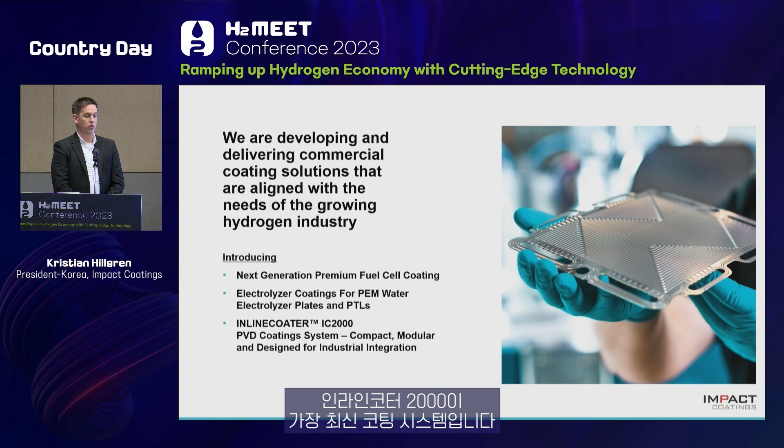Here we go. This is really exciting stuff because we believe this could really be the game changer that will really improve the durability of metal plate fuel cell stacks. Here we have a brand new coating with extreme corrosion resistance. This will handle voltage spikes up to 1.6 volts for more than 10 hours. This means it is reversal tolerant, or cell reversal tolerant.

Whenever you drive, you have a mobility stack. You want very stable voltage, but real world driving data shows you don't have it. You have spikes occurring for a few seconds, and they are really transient. But the only way to solve this is to have materials that don't degrade. You could have feedback systems and try to manage the system, and surely that will improve the situation, like controlling gas, humidity, and so on. But the question is, are you fast enough?

Similar technologies, or concepts, I should say, were also developed for the catalysts, where you have reversal tolerant anodes, for example. We also have really low contact resistance for this one, so it means you get high fuel efficiency.

And overall, this high corrosion resistance will also help to protect the membrane and the catalyst, because if you have corrosion from the metal plate, like you can leak chromium ions, nickel, for example, this will have a very bad effect on the catalyst layer. So if we prevent this, we also improve the durability of the membrane. So it's really a positive spiral, you could say, in this case.

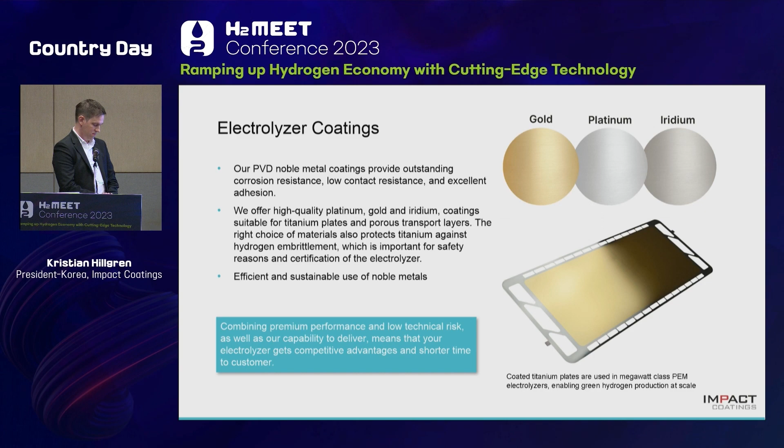Coating machine - well, you need a coating machine to produce. We do coating service, we take care of everything. The customer buys the equipment, you eliminate logistics. You have your own machine, you can run 1 shift or 3 shifts, you can run it fully automated, you can have a robot integration. Small footprint, modularity, can be used for both fuel cells and electrolyzers, depending on the configuration.

Some recent updates: cloud-based data analytics, so being able to see what happens in the coating machine. Traceability - all plates will have laser marking, be QR code tracked, so in 10 years you can trace back every single plate that was ever coated.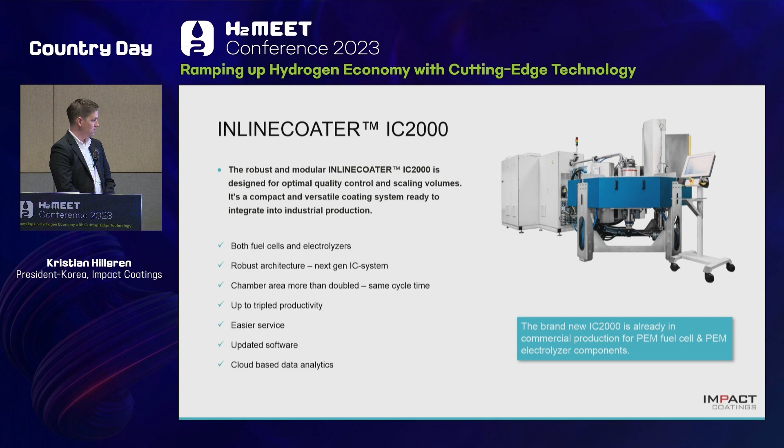Going back to our complete coating solutions offers, we have really cost-efficient production depending on what the customer needs. Coating service - no investment, scalability. Equipment - some investment, sure, but then you can get a lower cost per part in the end. We're flexible, we have scalability. One of these systems could produce millions of plates. If you need twice as many, you get 2 systems. If you need 20 million plates, no problem, you have a couple more systems.

Durable performance - we think this is one of the key technical issues that we are addressing and solving, since it's very likely that it is very expensive to replace a degraded stack, fuel cell or electrolyzer in the field. So having a good premium coating that gives the right durability in the first place should give a lower total cost of ownership in the end. This is really why we think durability is key, and we fix it by solving the corrosion issues in the first place.

PVD is also a green, sustainable process. We only use electricity. These are vacuum coating systems, so there is no chemical waste. You don't need any special license to set up operations for this. So it's all very green and sustainable technology in itself.

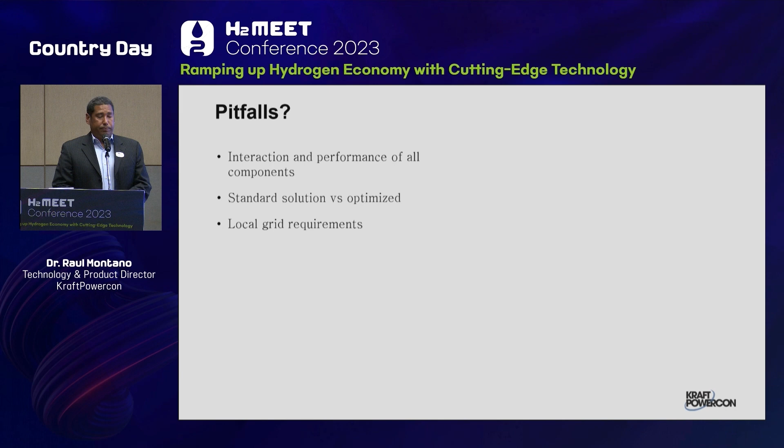You need to really start to think on the balance between CAPEX and OPEX. Just for you to have an idea, when you start to look into the energy need, you could run into problems of over-dimensioning. There is a rule of thumb today that if you want to have a 1 megawatt green hydrogen installation, you need to have access to at least 2 megawatt green energy. So if you don't look carefully into these different factors, you're going to be over-dimensioning, and then naturally your project business case will not fly out.

Then you need to start to think on the overall economy of the plant. Today, the economy goes into already set sales targets, meaning that we have already sold the productions, but we need to think of hydrogen as an energy carrier, meaning that you could be the backbone of the electrical power system. You could sell either hydrogen, or if you have the capability and capacity to be in a bidirectional system, you could also sell electricity.

So all in all, what we wish is just to try to optimize what you see when you start designing your plant. Just really look into the overall context of the design of the plant: what are the requirements from the grid, where the plant is going to be located, what kind of technology you're going to be using, and then try to control what you don't see.

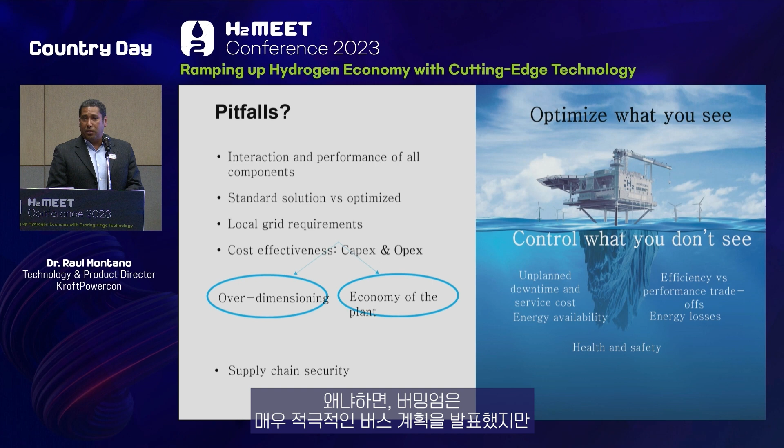And I can just take an example. Recently I read an article that was against the hydrogen technology in Birmingham, because Birmingham City had launched a very aggressive bus plan, but they didn't secure the supply chains for hydrogen.

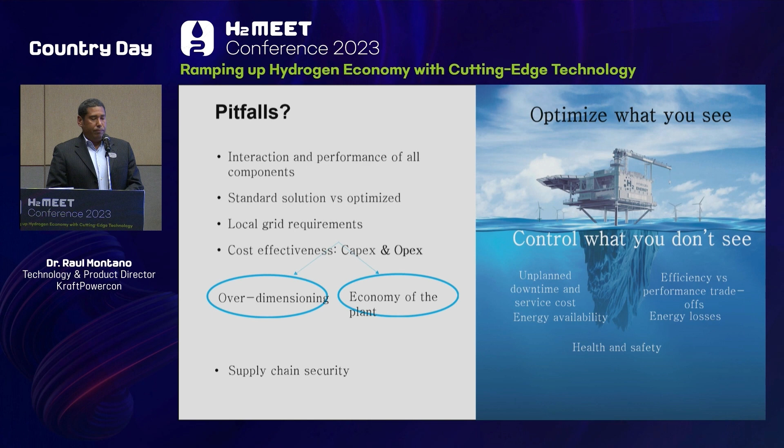So another important issue is the location. We can't just take every project as equal. You need to start to think whether your project has access to electrical infrastructure. Is your grid strong enough? Is it a weak grid? You can't take a simple standard solution for each of the problems or solutions, because otherwise what you're going to be running into is operational challenges.

Then, what are the requirements that your network and your infrastructure need? How many segments are you going to be dividing your plant into? Now we are talking about 100 megawatts. Imagine the impact of removing 100 megawatts from the power grid. That will be a no-no.

So you need to really start thinking how you're going to be sectionizing the project, how you're going to be operating the project. If you have only access to 80% of the energy, how can I just optimize the overall plant operation?

And is it an isolated process or is it within an industrial process? That's also something important. Do you need redundancy? And more importantly, do you have access to means of filtering or other means that could save the investment of the project overall?

This is something really interesting, and I would like to take a couple of minutes here. There are two dominant technologies when it comes to powering the green hydrogen industry: one is based on thyristor technology, the second one is based on IGBT. Based on different marketing strategies, there have been a lot of speculations around IGBT and thyristor.